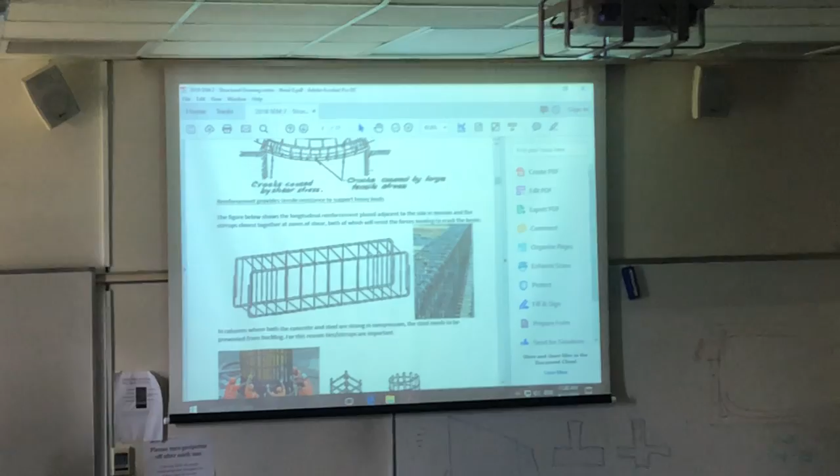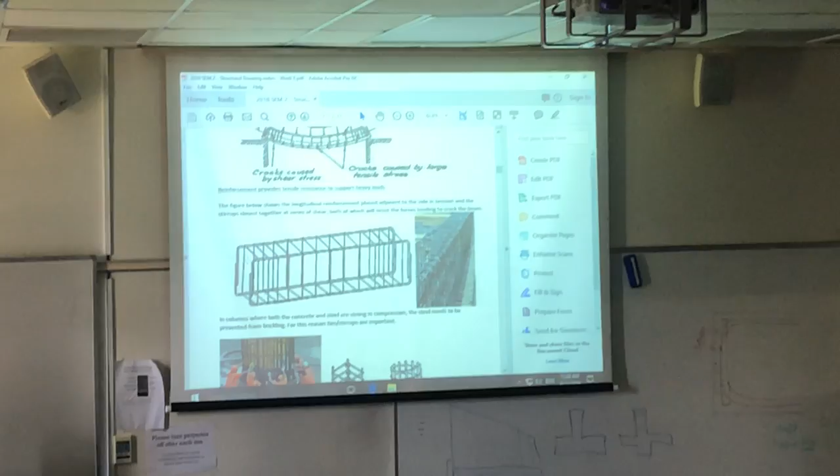It is very tempting just to ask the best person in the class to copy theirs. Yes, you'll still get some good marks, but you won't do my test. You'll just be over the top when it comes to doing that. So it is well worth it putting the effort in a group situation.

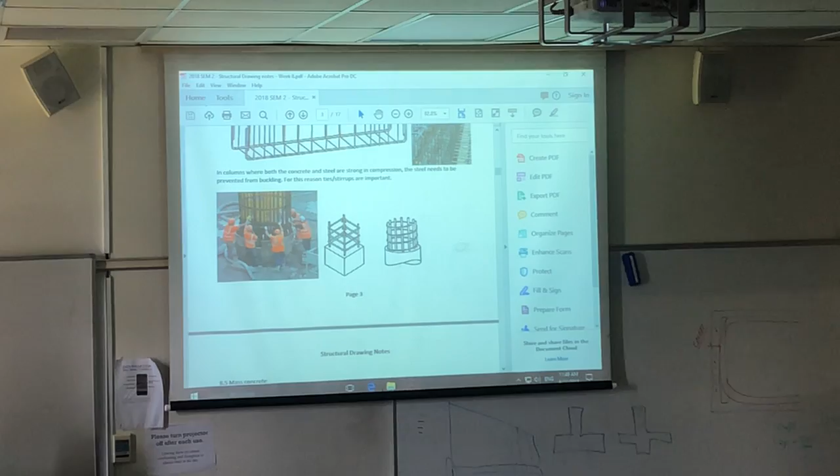Unfortunately, some of these examples have all gone now. 3 years ago, we had the motorway coming out of the tunnel with the great big ramps going over the top. We had this situation here holding them up. This is, I think, a photo taken directly from it. And this piece here is your formwork. They would pour the concrete, and it's shaped in such a way that the crane would lift it up, then they'd do the next pour, lift it up, and then at a certain point they would join on to that reinforcing with the next bit of reinforcing with an overlap.

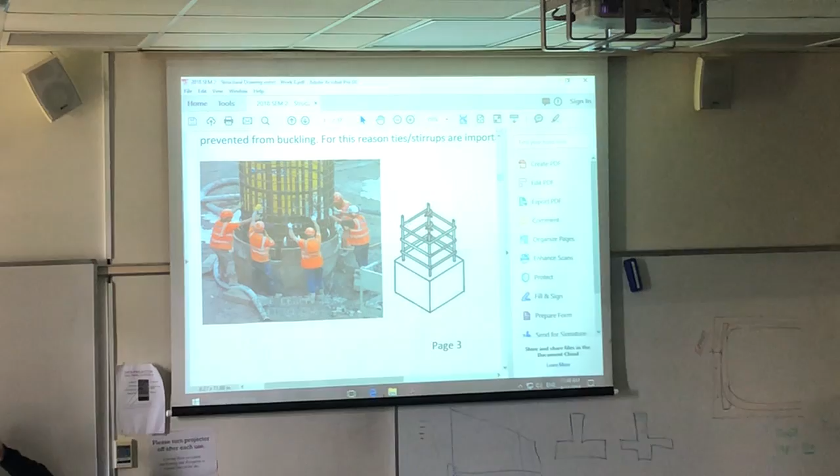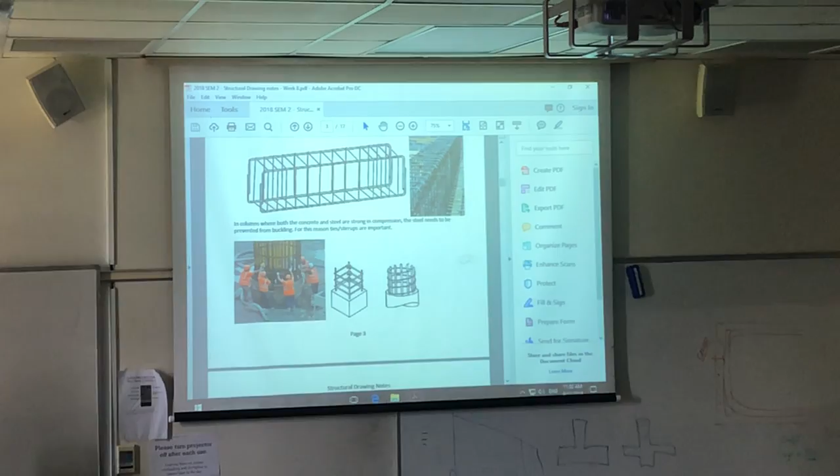And I used to encourage students to take a walk around there and have a look at it, because you could see it all going on. But if you ever get an opportunity, they do field trips, and the last one was to the Sky City where they're doing a lot of work, and most feedback from students was it was a very valuable trip. They learned a lot just from looking at what was going on. So you know, I've sat in an office most of my life doing drawings, but you can't beat being on site to see what actually really happens.

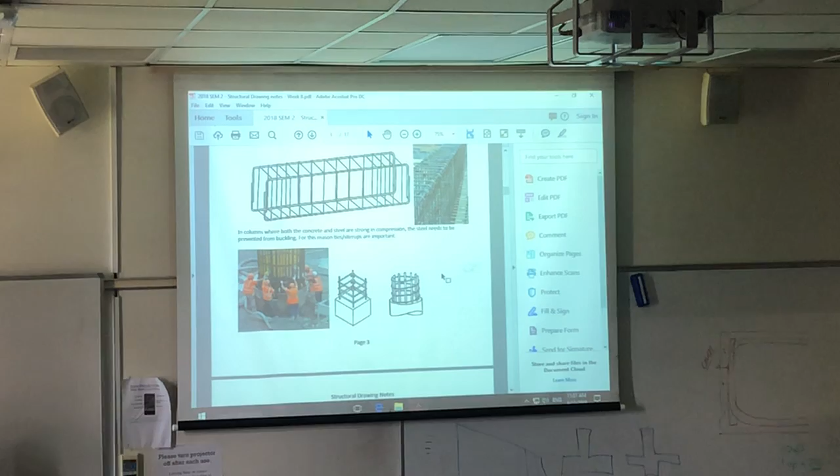These members here that bind the vertical bars, we call them stirrups or ties, and they're usually from bars that are smooth, so they're not deformed. They don't have those ribs on them, because their main purpose is to hold the other bars vertically together. So they are normally smooth or non-deformed bars, and they're normally in a situation where they're holding other bars together.

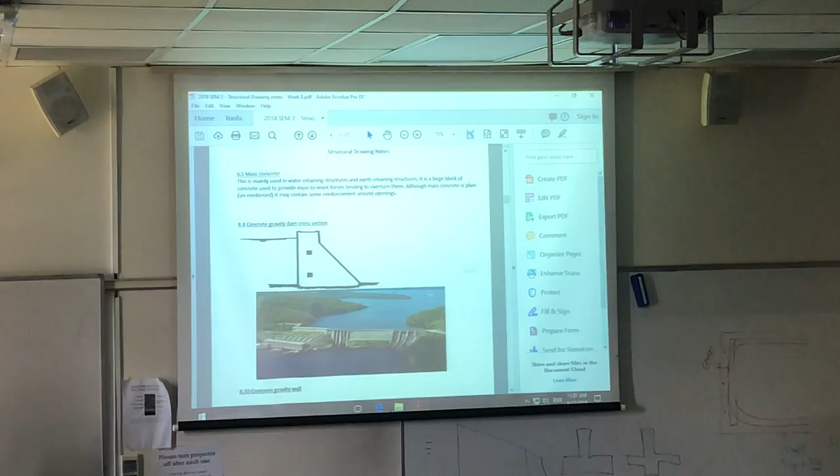If you don't know by now, I don't ever stop banging on about the Clyde Dam, because that was my biggest site experience. The Clyde Dam was what we call a gravity concrete dam, or a mass concrete dam, and there's not a lot of reinforcing actually in the shape of the dam, but there are around these things they call galleries, which are holes through the dam, and they use them to do what we call dam deformation surveys. So the surveyors in there are using very complicated machinery, and they're measuring in millimetres how much the dam is moving. And that was all set up inside the dam when we were doing it at the time.

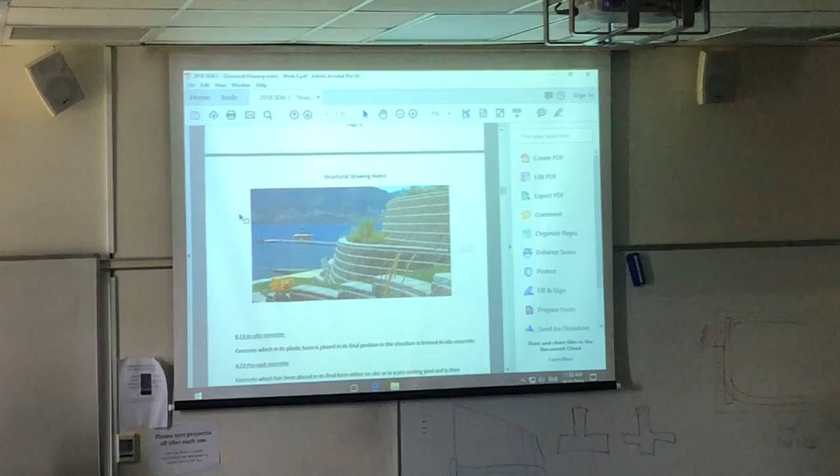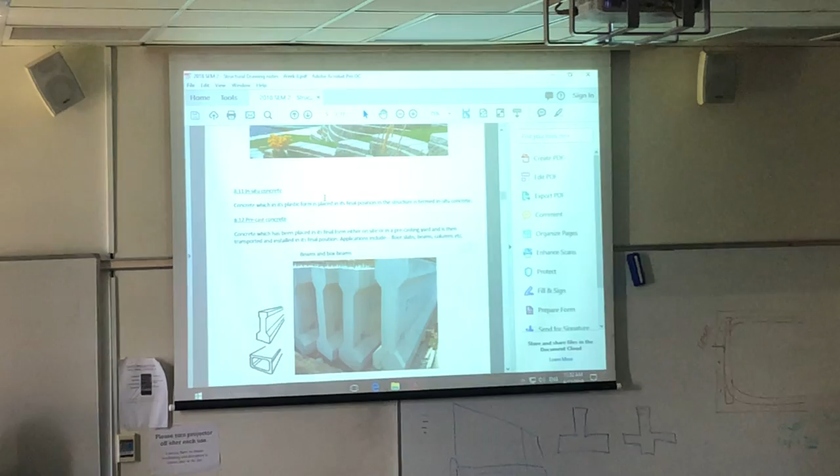Another example would be a gravity wall. Here's a picture of a gravity wall here. So basically the wall is being held or clicked together just without reinforcing, just with pure concrete blocks. And then we've got what we call in situ concrete, which I'll talk about shortly, which is concrete that is poured on site. In situ's, I think, Latin for on site. You could look that up if you wanted to, but it's what we call on site poured concrete. You're going to be doing on site poured concrete for your abutments. So there's a nice word you can use, in situ poured concrete.

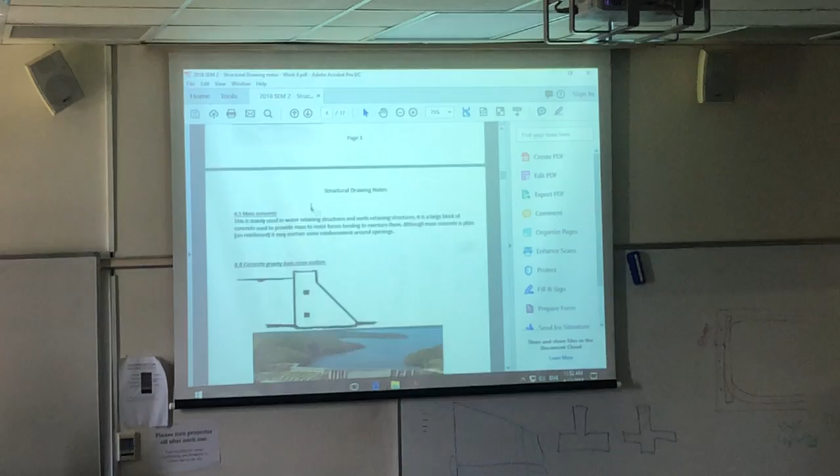There's another thing to think about as well in terms of your notes. How the hell are you going to get a big concrete truck over there? We'll talk about that a bit further down the line. The other type of concrete which I mentioned before is pre-stressed or pre-cast concrete. And that's concrete with these bits of steel in here you can see at the top, stretched vertically through here. There'll also be some horizontal members as well.

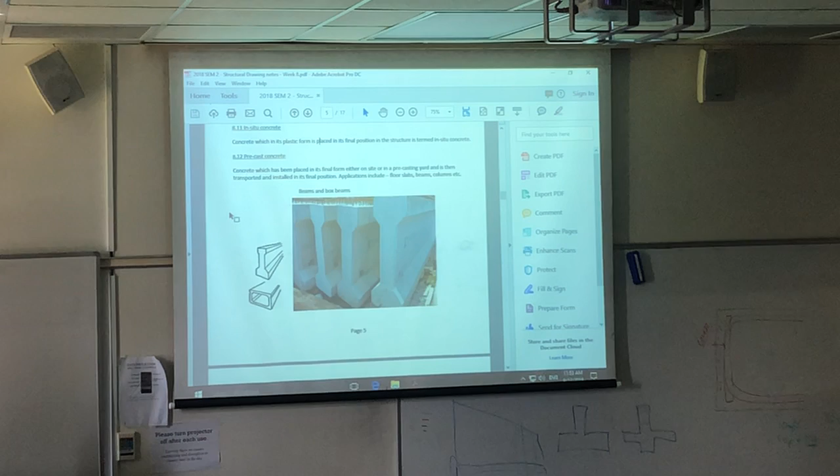They'd be used for things like floor slabs, beams, bridge beams, etc. Wall panels is another example of pre-stressed concrete. Probably one of the fastest ways of construction there is, standing up wall panels and clipping them into place or bolting them into place.

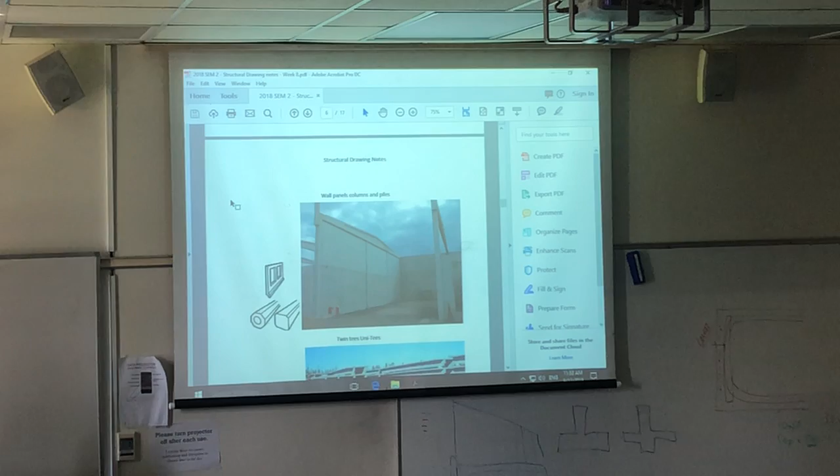Twin T's, double T's. I keep this in my notes because I was involved in a job, Mount Albert Pak'nSave, which is just around the corner here from Unitec. The lava flow coming down, oh here's me using geotechnical terms, I shouldn't really be doing that. Okay, the stuff that comes out of volcanoes and flows down the side of the hill, that lava flow went down past the Pak'nSave, and out towards Point Chev.

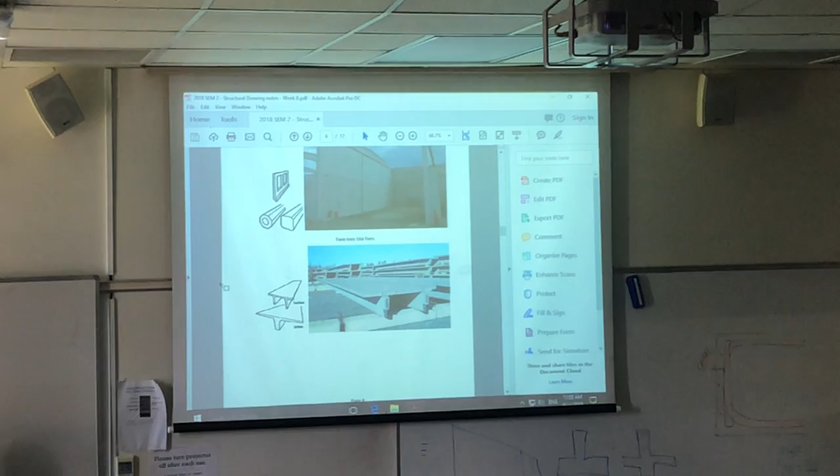Now, because that's volcanic rock, you can't just get a digger and go and remove it. You've got to actually blow it up in segments and remove it that way. So construction was very, very costly, and a very clever engineer that I was working with came up with the idea of using twin T's, which are this one here, which has got the two members coming down, because with twin T's, the height difference was about 200. So therefore he was able to save 200 in excavation underneath the Pak'nSave. There's a large car park under that building. And that solution saved Foodstuffs quite a lot of money at the time. That's an example of using twin T's instead of single T's.

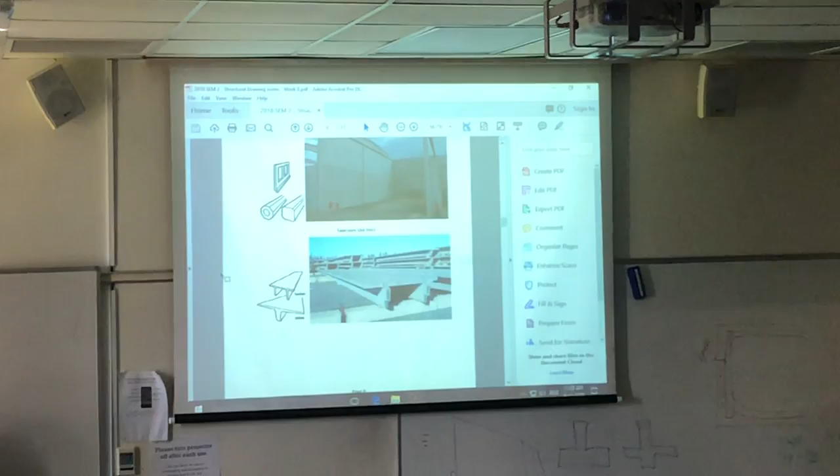There was a disadvantage. It's the weirdest thing. Before they loaded it up with all the stock, the building used to bounce. And the guy driving the forklift, when he was loading all the stock up, was literally bouncing. It was like he was on a trampoline until he got weight down on the twin T's. So the twin T's, they didn't realise it at the time, but they ended up with a lot more bounce until the whole place was loaded up. It was weird. I was down in the car park and you could hear this thing bouncing up and down on the top as they were loading it all up.

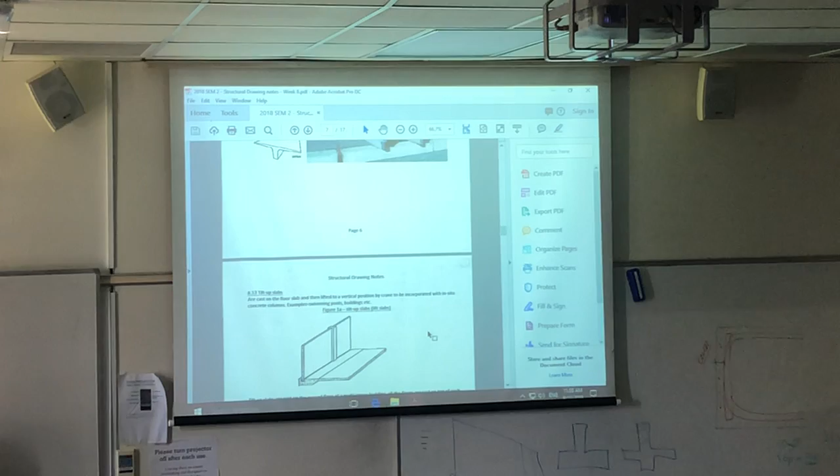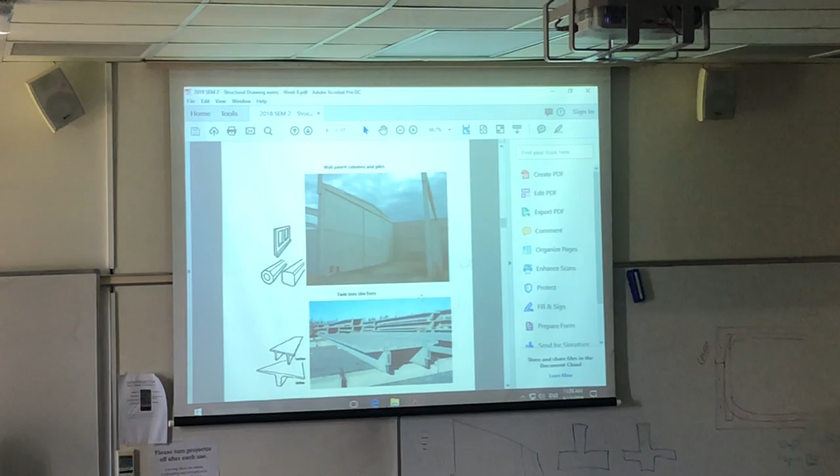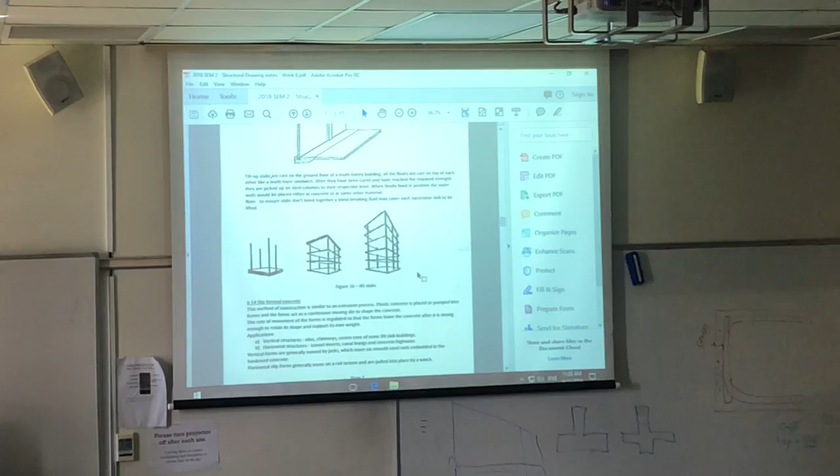However, I have asked about steel grades. Most of our steel comes from Waiuku, the steel factory in Waiuku. And there's two types of grades, grade 300 and grade 500. The most common grade, and this is a question, is grade 300 steel. It's also a good note actually, because that's what you'd be using in your job. 500 is a different type of grade, and it's considered not weldable.

And I think I'll put that as a question as well, but I just want to talk a little bit more about that. We don't do welding and reinforcing anymore in New Zealand, okay? So if you want to lengthen a bar, you don't just weld the tip, you overlap it. They might do that in other countries to save money, but we don't do that in New Zealand. And I guess, one, we're a Western country, but two, we have a lot of earthquakes. How much do you overlap it by, sir? Beg your pardon? How much do you overlap? Like, is it a big distance or a small margin?

Well, when you've got, for example, a building with a slab that's going for a long, long way, and you can only buy, say, 7 metre long reinforcing, and say the building's 30 metres, then you're going to have to overlap one and then overlap another one as well, maybe even a fourth one, right? And that lap binds each section together. And it's the same when you go up. Any multi-storey building, like the Burj in Dubai, that wouldn't be one big long line of reinforcing. As they go up, they overlap the bars all the way up.

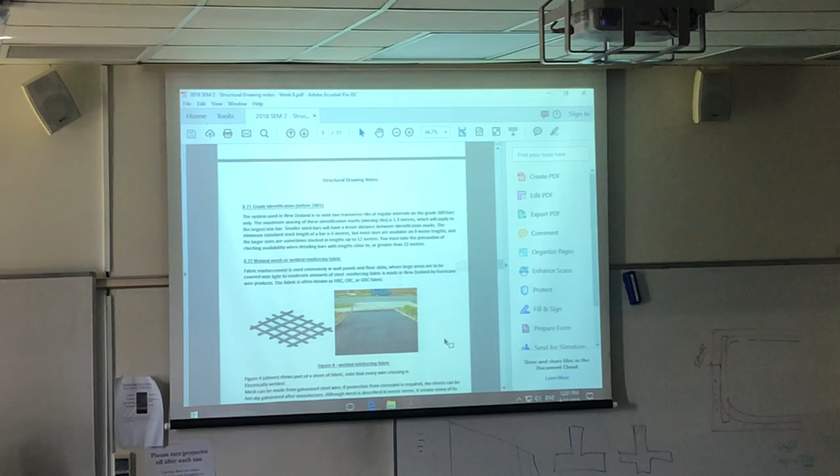What you've got to realise is that welded mesh or welded reinforcing fabric, as they call it, is not a structural way of reinforcing. It is fine for binding the concrete on a 4-inch or even a 6-inch driveway, and it will work as far as the strength of a truck or something like that goes on it. But they don't use it for walls and floors and ceilings and things in houses, or for structurally binding a house together.

What they tend to do with floor slabs on new builds, I'm just trying to remember back to mine, is they tend to also run reinforcing rods through it, and they tie it all onto the mesh. Mesh is basically just a way of stopping the concrete cracking at the end of the day.

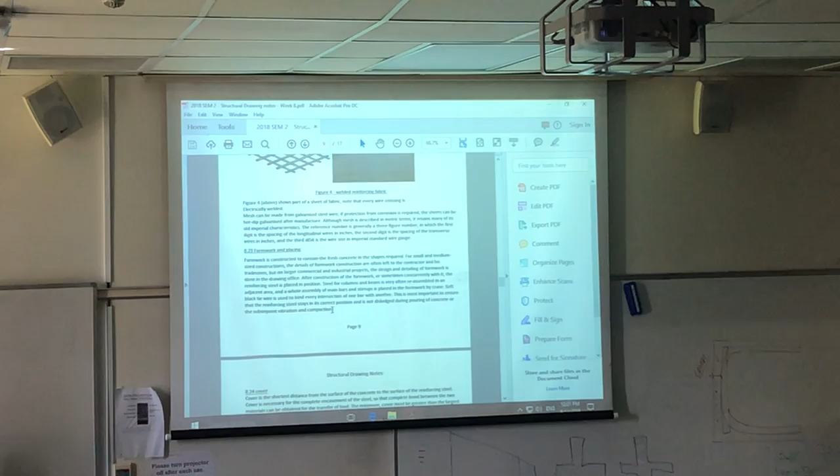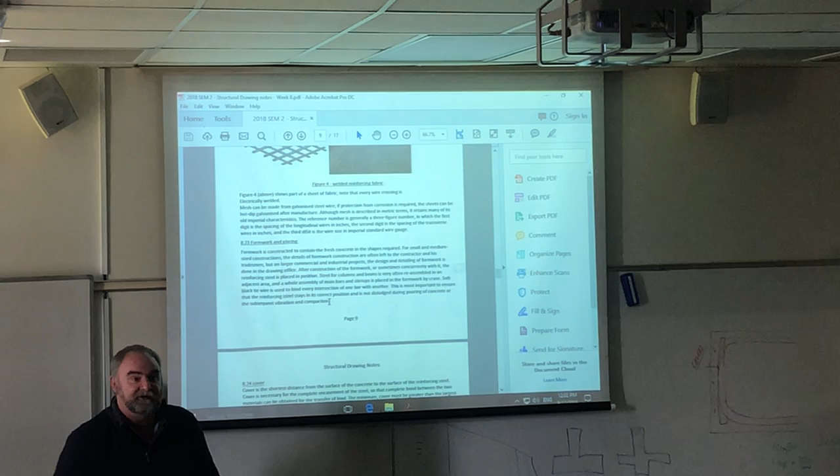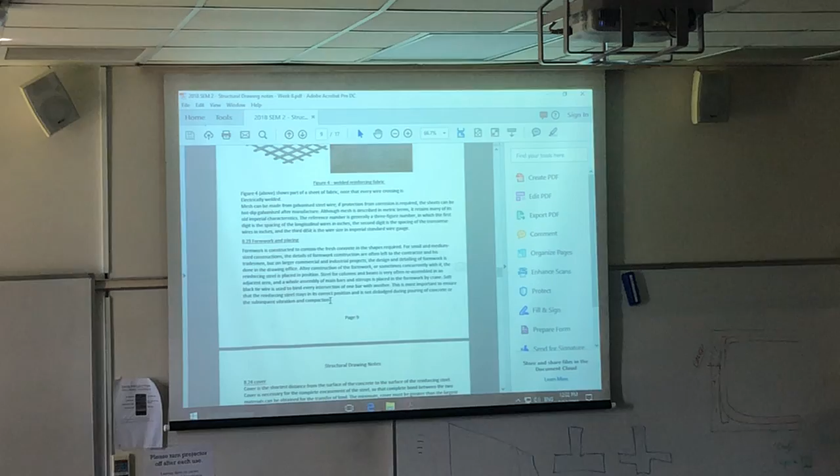Formwork and placing concrete. This little diagram that I'm about to do has got a couple of questions in the test on it, and I've had a lot of students that are a bit confused because in other countries they call things slightly different. Okay, I said I'd leave that, so I'll leave that.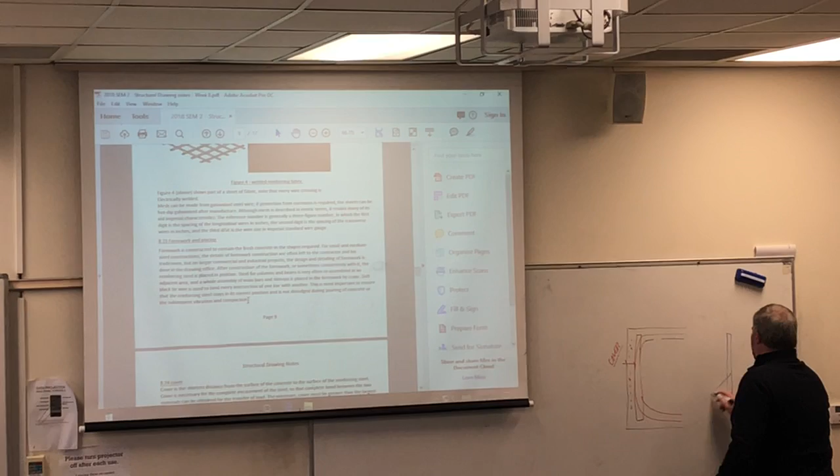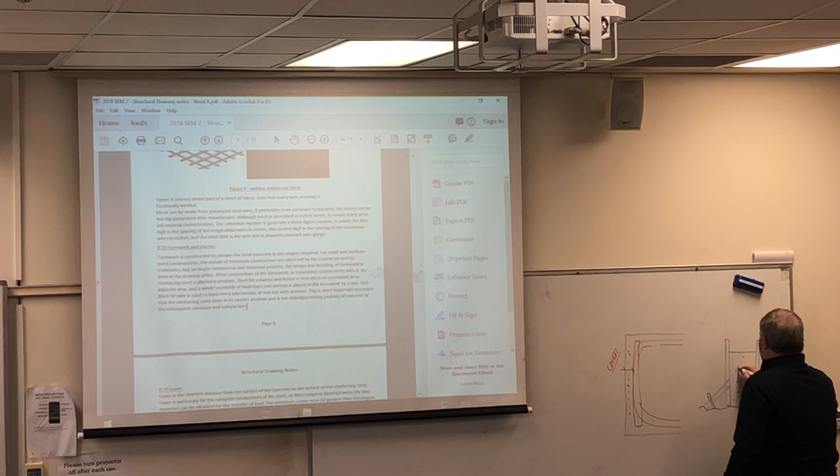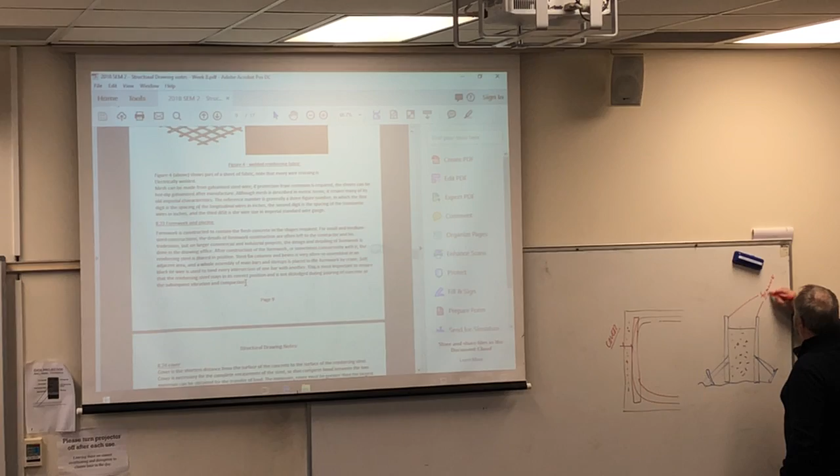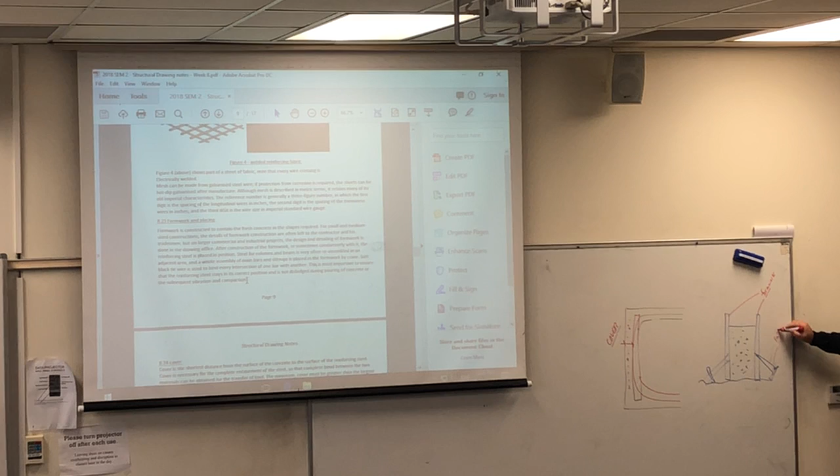Does anyone know the difference between formwork and falsework? Formwork and falsework. Because I didn't. Straight out of school, had absolutely no idea what my lecturer was talking about. Okay, this is what we call formwork. And the way to remember it is that it forms the concrete to the shape you want it to form. This here is what we call falsework, which is basically everything that's holding the formwork up in place.

Okay? Now I've seen formwork that's been steel, where they've washed it down and moved it along to the next section, then the next section. And on the Clyde Dam they did that a lot as well to save money. Because you can only basically use tannalised timber so many times, and you've got to buy some more. Whereas with the steel, washing it down, you get a smoother face, and you can move it along to the next bit.

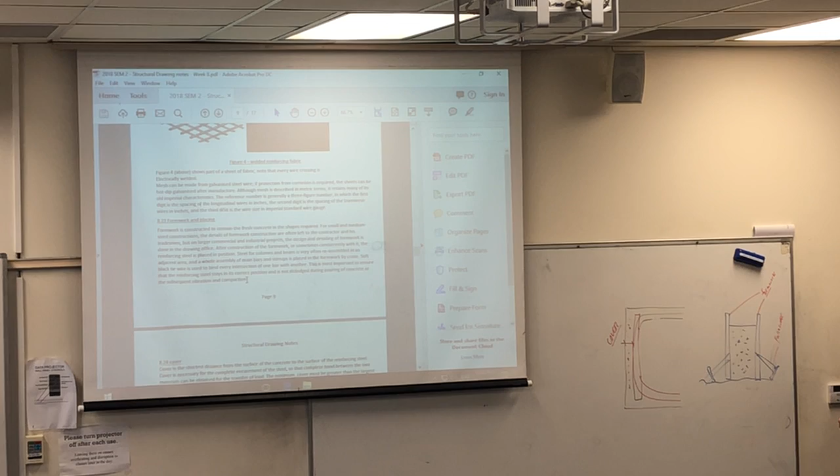Falsework. Falsework does not have to be fully tannalised. The tannalising process is a process where they make the timber more durable to the outside elements. In other words, it can be out in the rain, it can be in areas where there's geothermal reactions, it can be close to salt sea, and all that sort of thing if it's been tannalised. If it hasn't, it doesn't last very long.

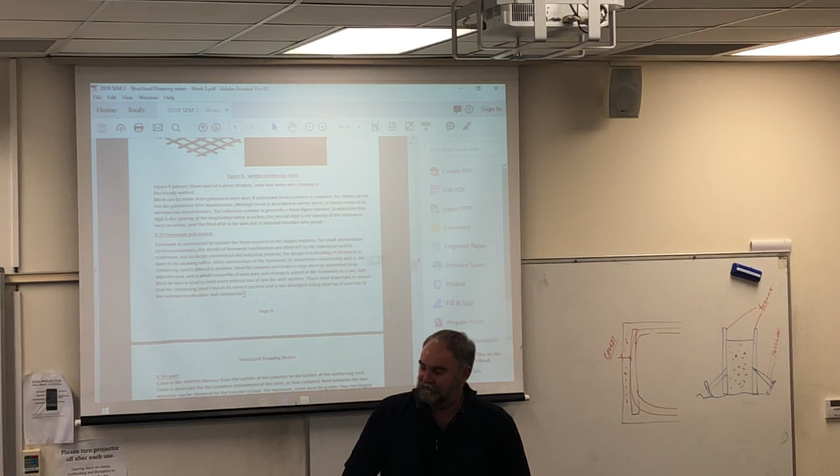It's like putting a piece of furniture outside. If I put this bit of furniture here outside for a few days, it's got some sort of covering on it that might keep it for a few days, but underneath it's untannalised. If I turned it upside down, it would rot within just a week probably.

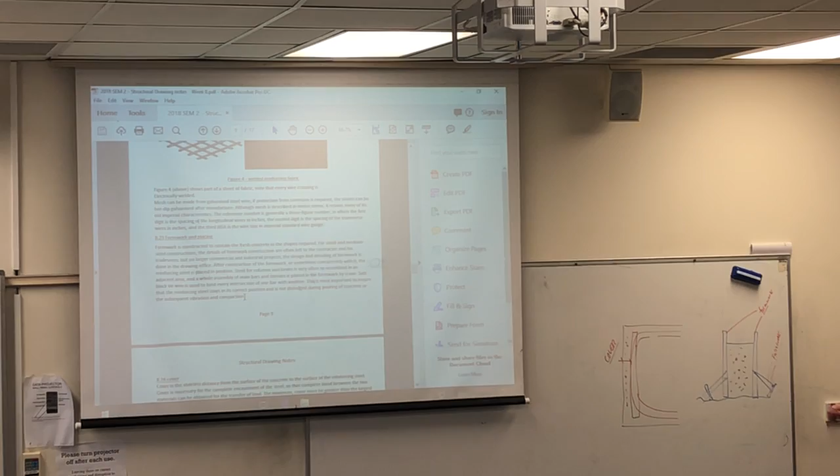So we tend to use untannalised, very cheap timber for this, because it gets ruined anyway. By the time you get your hammer and you pull it all apart, pull it out, it gets all broken up anyway. So the cheapest chuck-away timber, but for this we tend to use tannalised or steel. But the confusion in New Zealand is typical Kiwis.

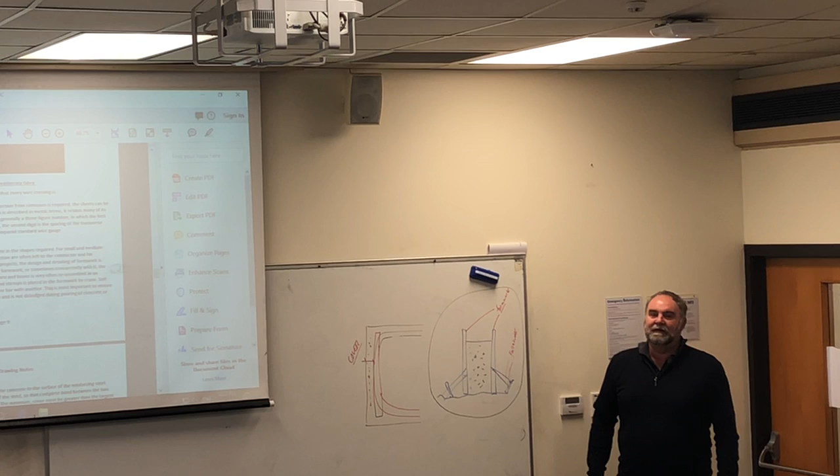After saying boxing and falsework and formwork, you're going to get a Kiwi guy going, "Where's all the boxing?" And you guys are going to be going, "Roger never told me what boxing was. I know what formwork is." This is what we call boxing.

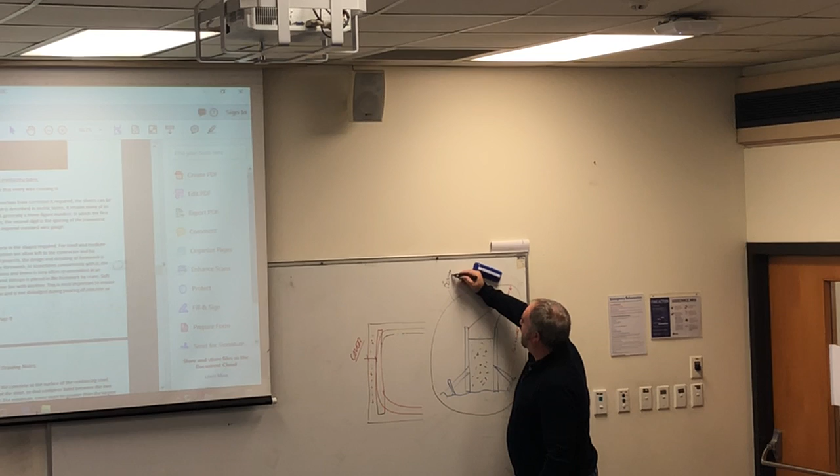Okay? So when you're calculating on a job the cost of anything, if you're a surveyor and you get sent to a job to measure up or take some marks on some boxing, they're talking about all of that, and you can question the person who says it and say, "Does that mean you want me to take a shot on the top of the formwork?" And, "Oh yeah, that's what I mean." So boxing is everything, all right?

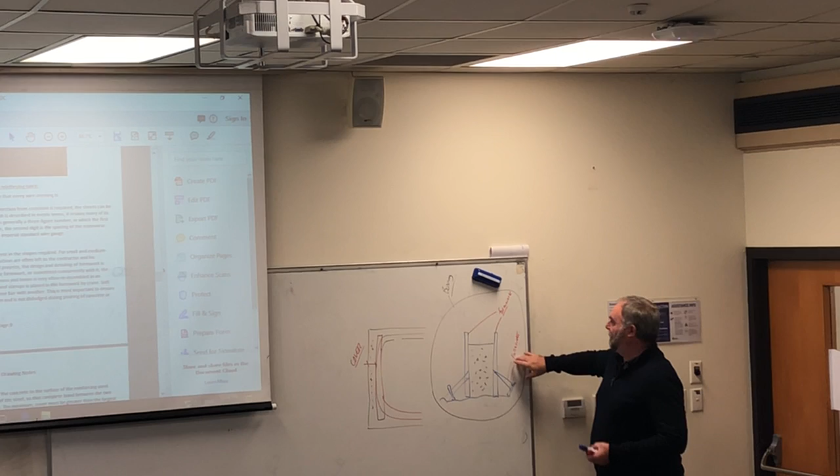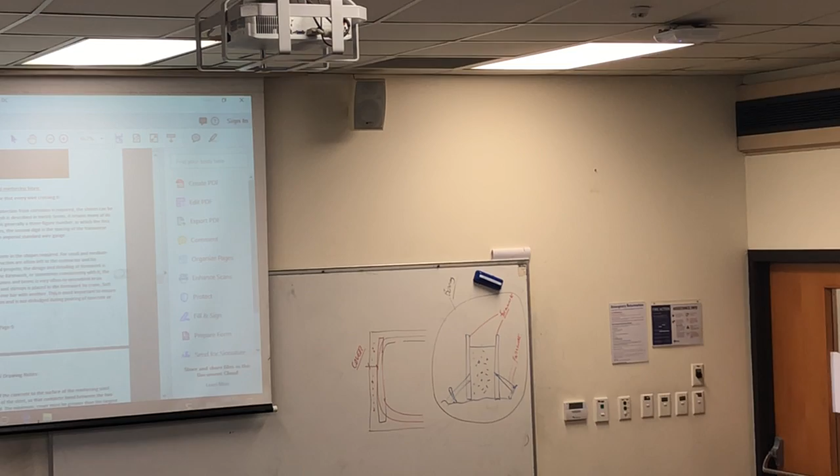Formwork, falsework, and there is a question on that in the test, and you may like to read those notes and include something like that in your assignment as well, because the abutment drawings you're doing is